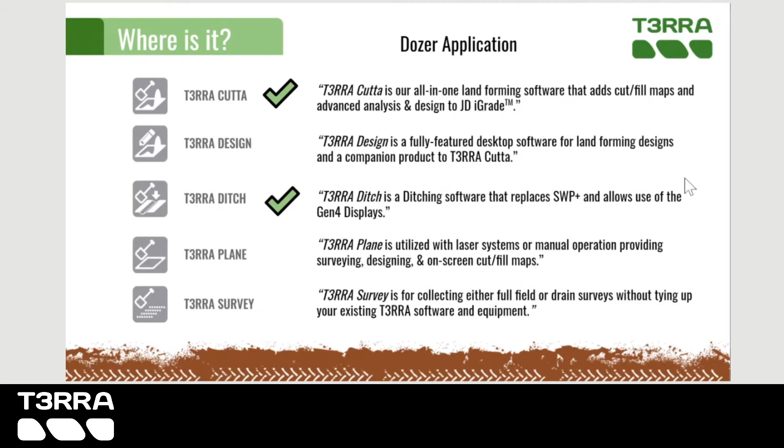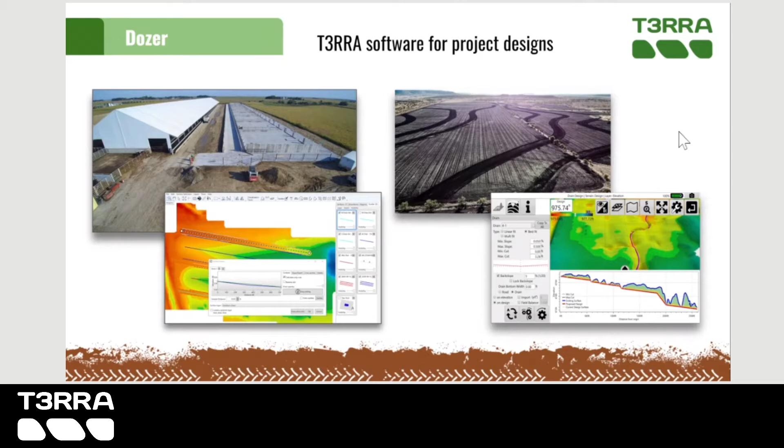Sathya, you want to give us some hardware overview? Yeah, absolutely. So just to give a quick rundown of John Deere iGrade, generally speaking. So iGrade is an RTK-based GPS system for land leveling. T3RRA software is designed essentially to interface solely with this John Deere iGrade system for automation of scraper blades and various modes for performing different types of land leveling work.

So the iGrade application controller essentially provides electrical analog voltage signals to a hydraulic controller, which then performs the movement of an implement. That's important to know because the hardware we've been working on is essentially performing a bridging conversion between the application controller outputs and non-standard valves.

So T3RRA software essentially provides elevation target information to this iGrade app controller, which then calculates differences in measured height versus expected height, and then adjusts the scraper to meet the requirement of whatever surface they're trying to implement.

So iGrade as a whole system basically consists of one or more RTK GPS receivers, as well as an ISOBUS display, manual controls, and then the iGrade application controller in combination with various pieces of harnessing. And there's quite a bit of harnessing involved with an iGrade setup in most cases. So move on to the next one now.

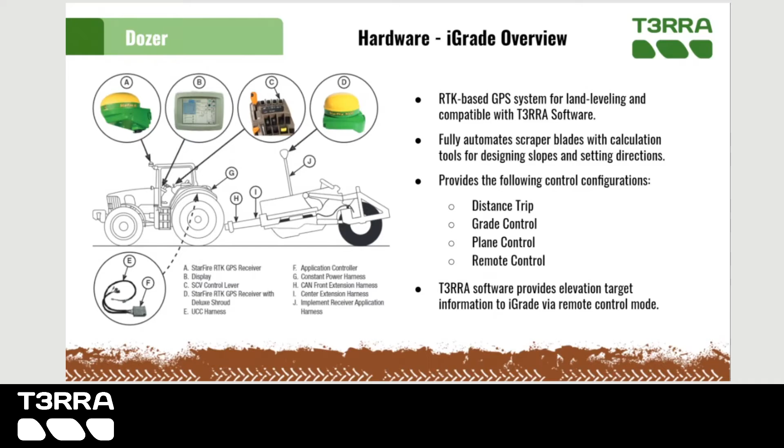Okay. So with regard to our Dozer implementation, we're still in very early stages in terms of applying John Deere's iGrade system to these non-standard machines. We've currently implemented the system on a John Deere 700L dozer and a John Deere 850L dozer.

Both of these L series dozers were very similar in terms of their implementation, and so we feel fairly confident at this point that we've worked out most of the kinks when it comes to L series dozers. But despite having worked on the L series a fair bit, we're very interested to explore different models. Cat and Komatsu are brands that have been in our eye lately.

And we basically provide two pieces of hardware, which is the VM512 valve module and the SMJDDzL switching module. I won't take credit for that particular name, but essentially those two are used in unison to perform what I mentioned earlier, the bridging conversion between the application controller and non-standard valves.

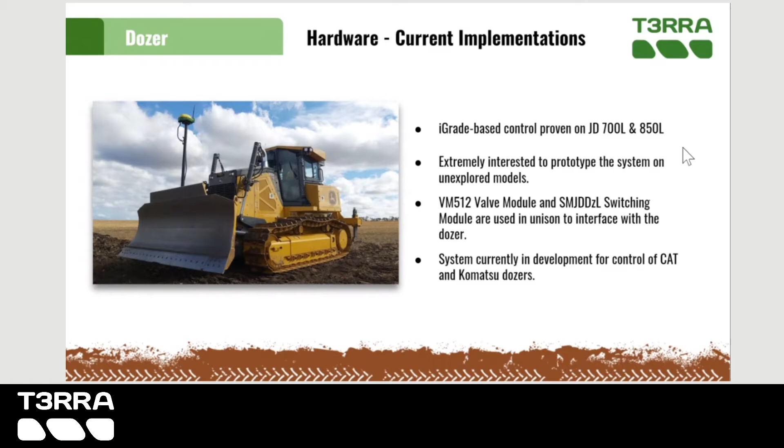And in addition to that, we're currently developing some new hardware at the moment, which aims to provide an easier plug-and-play interface for trying control of Cat and Komatsu dozers as well. So that about covers current implementations.

So when we're looking at a bulldozer and trying to gauge the amount of pain that will be involved, the amount of knowledge that needs to be gathered, and the amount of patience that the customer or dealer will need to have, basically we're looking for information on whether there's a presence of third-party or aftermarket grade control systems. Usually, in the case of bulldozers, these would not be John Deere brand. They'd usually be something like Topcon. But it's always good to be aware of the presence of such systems, because usually their presence indicates that interfacing will be generally easier than a manual installation and conversion.

So piggybacking off of that, it's nice to be aware of joystick control mechanisms, as well as physical access to connections, as well as valve control mechanisms, whichever type of electrical signals are being used to control the valves, as well as what kind of access is available to their connections. Machine documentation from manufacturers is ideal, but we are definitely comfortable with performing some reconnaissance and essentially figuring out what is going on with a particular bulldozer's control systems. But in most cases, that'll require a fair bit of patience.

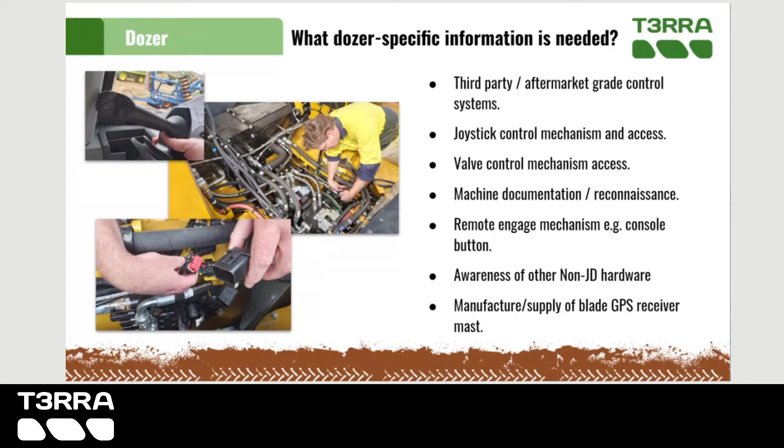So from an in-cab standpoint, the hardware involved with the John Deere L-Series dozer implementation of iGrade is essentially the same type of setup that you would see for any regular scraper system in the cab, which involves a touchscreen tablet for T3RRA software that has some minimum requirements in terms of specifications, otherwise it won't be able to run the software correctly. Other than that, it just involves a vehicle charger, mounting, and the connecting harness that supplies the data from T3RRA software to the iGrade application controller.

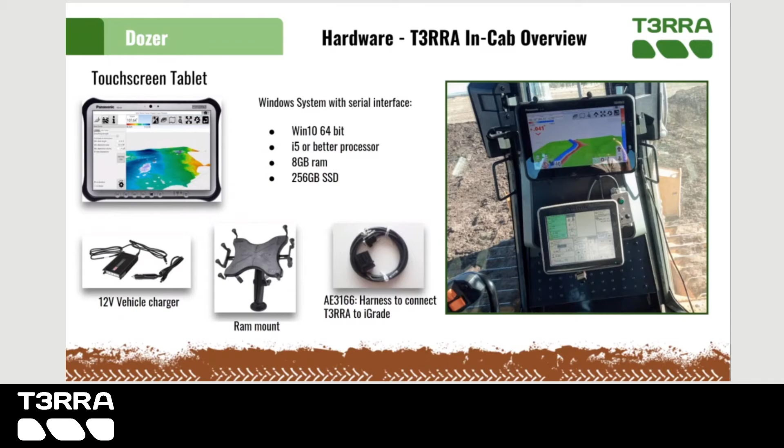And there are various aspects of mounting and choosing the correct positions to mount those devices. Obviously, the operator needs a good view of everything that's going on, and many dozers seem to have quite compact cabs, so it might be a little bit difficult to fit it in a comfortable way in some cases, but that would depend on the size of the bulldozer. Okay.

And external to the cab, there are various pieces of control hardware and harnessing, but the primary pieces of the puzzle are the switching module, the valve module, and the indicator module, which provides indication to the user whether the system is in auto or manual control, as well as power. As you can see, there's not a great deal of harnessing involved, to be honest. Six harnesses could definitely be worse, but the installation of each of those harnesses, even on an unfamiliar dozer, should be fairly simple, given good physical access. It's not a lengthy undertaking to install the hardware.

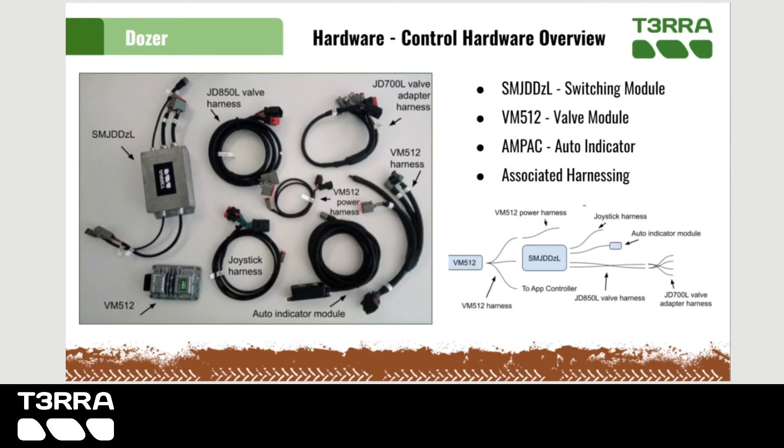And you can see in the bottom right there's a diagram of how the hardware links together, pointing out the different harnessing positions for each. And you might want to point out what we supply of what is listed here. Absolutely, yeah. Everything seen in that photo is something that we would create. There are going to be different length requirements for different bulldozers. So in a prototyping situation, there would likely be some need to create your own harnessing, because if we don't have physical access to the bulldozer, it can be difficult to measure such things. But our aim is to provide the entire kit once we're familiar with a particular model. Okay.

So the actual installation and mounting of the hardware in the previous slide, essentially there's just 2 control units that need to be mounted along with the iGrade application controller. And there's obviously going to need to be some space, either external to the cab or inside the cab.

So in this instance, we had plenty of space to mount hardware, but in some other cases, it might be necessary to either mount all of that inside the cabin as neatly as possible, or to find adequate space elsewhere if possible.

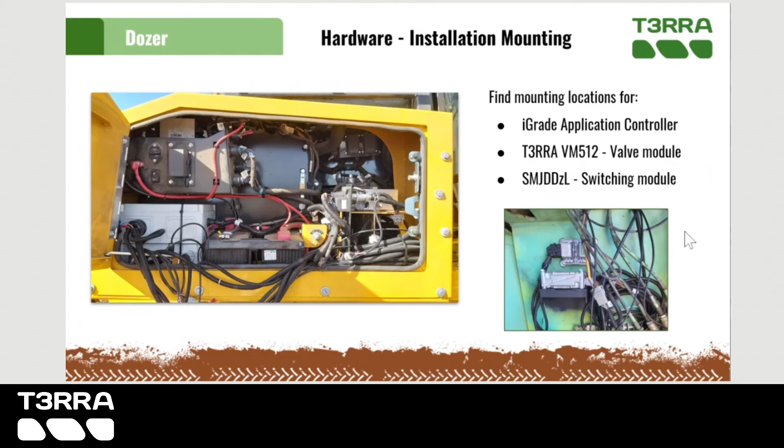So in terms of the joystick, on the L series dozer, we had quite a nice joystick setup. We were able to access the joystick connections via one of the side panels, and just freely access those. And the joystick possesses its own automatic blade control enable/disable button. So we were able to make use of that one eventually.

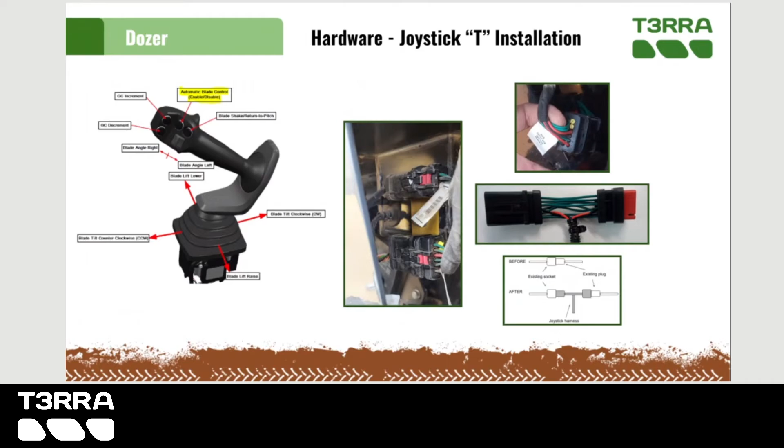So the system can be engaged and disengaged using the joystick, as well as having the functionality of feeding off of the joystick's output signals in order to sense joystick movement and delatch the system in the case of joystick movement. I think that's about it for the joystick. Okay.

Alrighty, and then the other components exterior to the dozer completely would be the GPS receiver and the blade mast. So there was a bit of tinkering involved with the blade mast on the 850L. We essentially mounted the receiver on the mast and then found that the blade was getting jolted enough to the point that the receiver antenna was beginning to show signs of whipping, and we had some definite concerns for damage there, because everyone who's familiar with John Deere hardware knows that it's not the cheapest thing to just replace your RTK receiver.

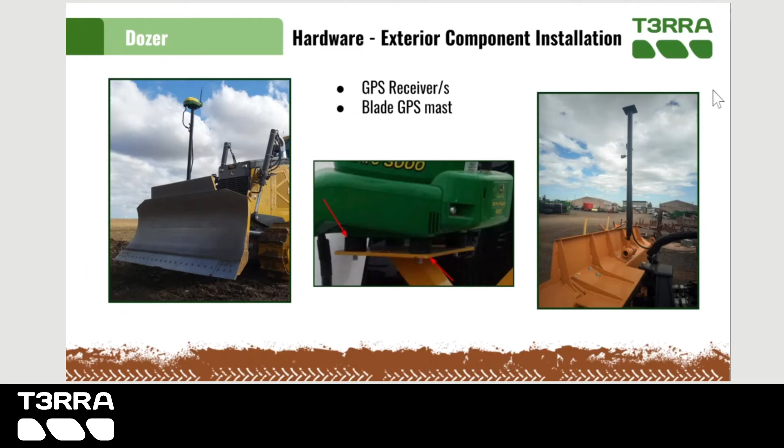So yeah, essentially we ended up reinforcing the blade mast a little bit further, which seemed to reduce a bit of the whipping, as well as mounting the receiver on vibration isolators in order to try and mitigate it as much as possible. Going forward, I would probably think that an external antenna would be better used in this kind of situation, if the coax cable can be run elegantly down the mast. But yeah, in this prototyping situation, we basically just needed the proof of concept. Mm-hmm.

And so I haven't gone over the theory of how the hardware actually operates in much detail yet. But basically the iGrade application controller provides 0 to 5 volt low current signal outputs, which generally would be appropriate for an SCV controller built into a machine, or some other types of control units, such as those for laser leveling.

Essentially what this means is that the controller is not capable of driving a high current valve, nor does it have the range to provide the adequate voltage signals for Danfoss style load sensing valves, or PVG valves as some people might know them. So the VM512 valve module aims to convert this 0 to 5 volt low current signal into various different output signals based on the harnessing that is created using the kit.

The VM can be set up to power proportional directional valves that require PWM current control, as well as straight directional valves, and like I said, Danfoss style actuators that use a 0 to battery voltage usually, and just operate based on a percentage of that.

So beyond that, the switching module switches between these newly created VM output signals and the existing signals that are present within the dozer. These might come from an existing hydraulic valve controller, or potentially there's possibilities for interfacing with the joystick outputs in other ways to provide valve power using those manual joystick outputs that already exist.

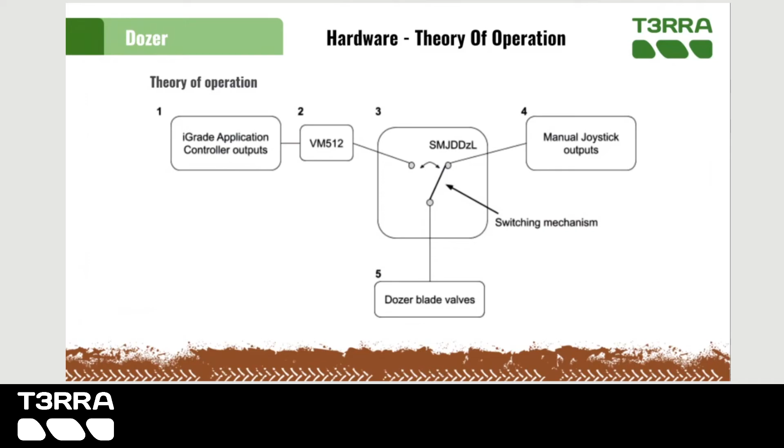I think that about covers as much detail as I was going to go on the theory of operation. But maybe one more thing I was going to mention was in the L series dozer, those particular valves ended up requiring a PWM signal, and so the VM was used to convert the 0 to 5 volt signal into a current controlled PWM output, and then the existing controller within the bulldozer was connected to the switching module as well. So there was essentially a wire path between the VM outputs and the existing hydraulic controller.

Okay. Well, that pretty much covers the theory of operation and hardware requirements. So let's talk about the software that we offer for the dozer application. The first thing you would need to do when you're utilizing T3RRA Cut or T3RRA Ditch to implement projects with a dozer is to enable the dozer mode in the dozer tab in settings. You then would enter the blade to dozer turn rotation point distance in the parameters. If you're following me, it's right here.

You have the option of enabling to lift the blade when reversing. If that's enabled, you can enter the reversing lift height for that feature. The latest release of T3RRA Cut and T3RRA Ditch has the new feature called blade positioning. So it is right here, blade positioning, and it's in the machine tab. So it's motivated by our recent dozer experiences.

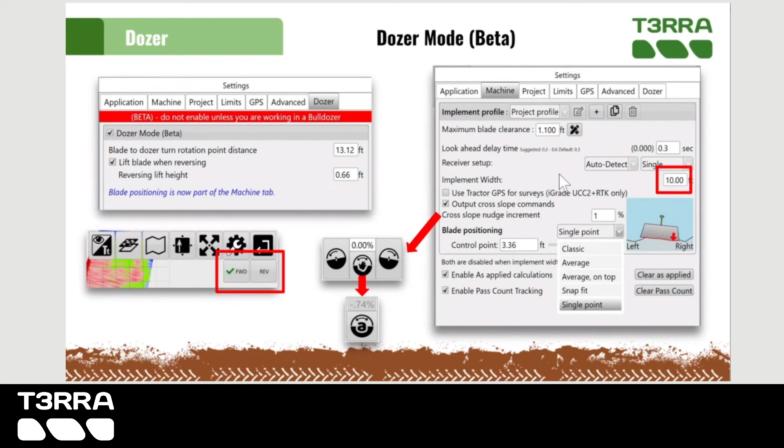So the slope can change under the blade from one side to the other along a bank or a feature, and this is likely to be the case when doing work with a dozer. Our blade positioning options assist users in not cutting below the design surface and getting as close as they can to it. So let's discuss each one of these options that you will have.

So classic is the position that uses the design elevation as the target elevation under the center of the blade. And the cross slope is determined by the design elevations under the left and right points of the blade. With classic, it is easy to overdig when driving down the midline of ditches or to clip the top of a bank when straddling the ridge.

Average. This position looks at the design surface under the blade and goes for the overall trend. This is great for taking any full field design and giving you basically that. It's not so good for abruptly changing slopes, however. And then there's average on top. This position is one step up from the trend method, literally. It determines the slope in the same way as the average method, but it always avoids overcutting.

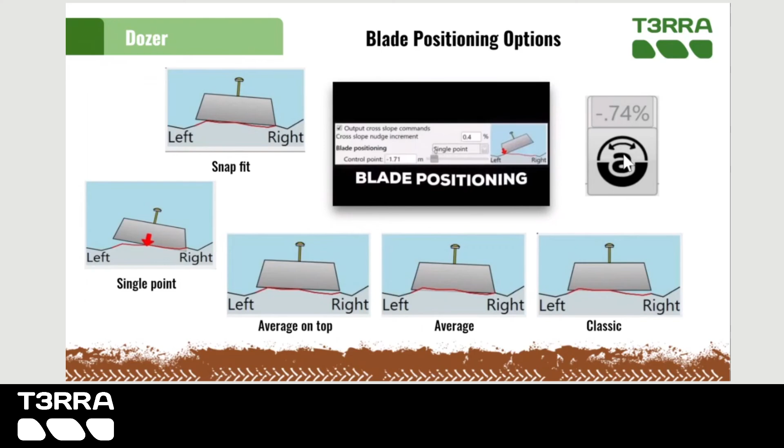And one final blade position option available in all situations from the implementation screen is you may set the cross slope manually. In this case, whatever cross slope you pick in the bottom left of the implement screen will be applied if you have cross slope control enabled.

For the trend method, it will tilt the blade while leaving the center of the blade in the same position. For single point, it tilts the blade but keeps tracking at the control point. Snap fit and average on top adjust the blade height to avoid overcutting.

Sathya, can you explain the implementation steps and your experience with it in field? Absolutely, yeah. So for my explanation of this, it'll mainly be pertaining to the John Deere 850L that I had a bit of experience with of implementation. So that was down near somewhere called Millmerran, which is somewhat close to Toowoomba, probably about half an hour away thereabouts.

And we had a customer there interested in prototyping this system for the use of building some contour banks. He essentially just had some sloping fields where the water runoff would gain too much speed and was causing some serious erosion. So he needed to revamp some contour banks, and he was keen to have a demonstration of the 850L with T3RRA Cut in order to do that.